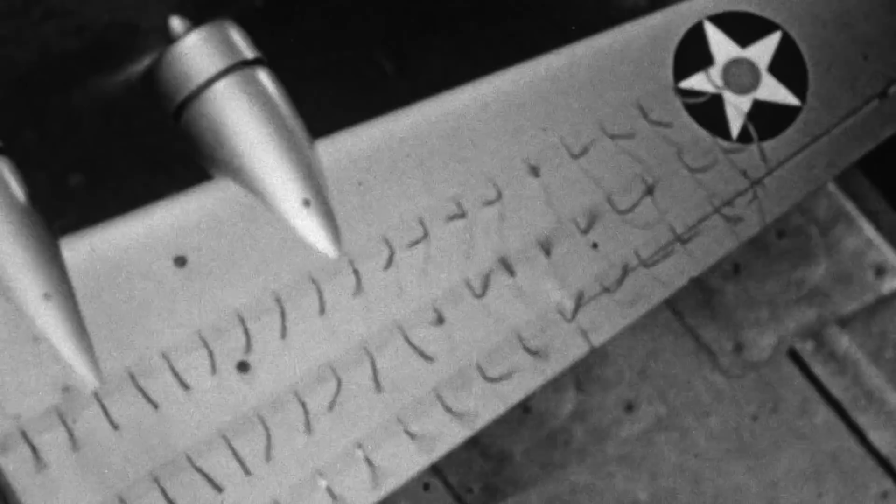The U.S. Army Air Corps wants a modern bomber. They want something with the range, the altitude, and the speed capable of delivering a load of bombs on a target. It's their vision of what future war will be.

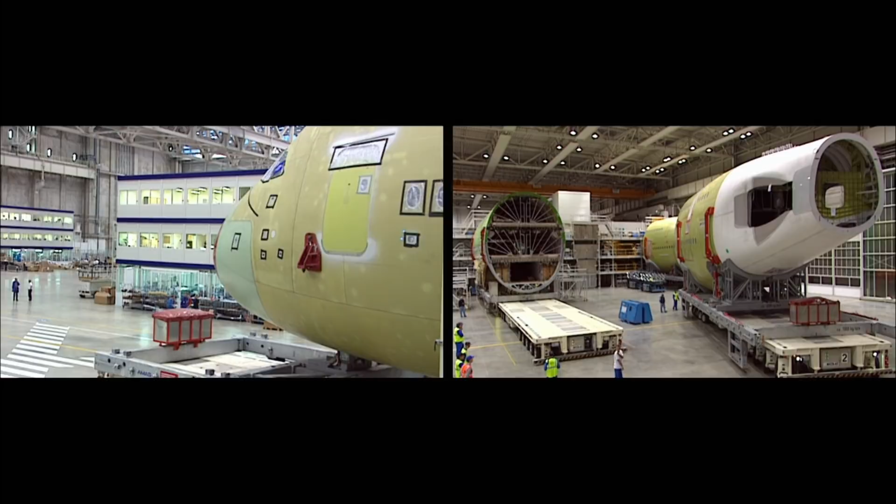Former aerodynamics engineer Charles Champion is appointed to oversee the project's toughest stage, building the plane. Champion will have to arrange for all the parts of the Superjumbo to travel to the Airbus assembly plant in Toulouse.

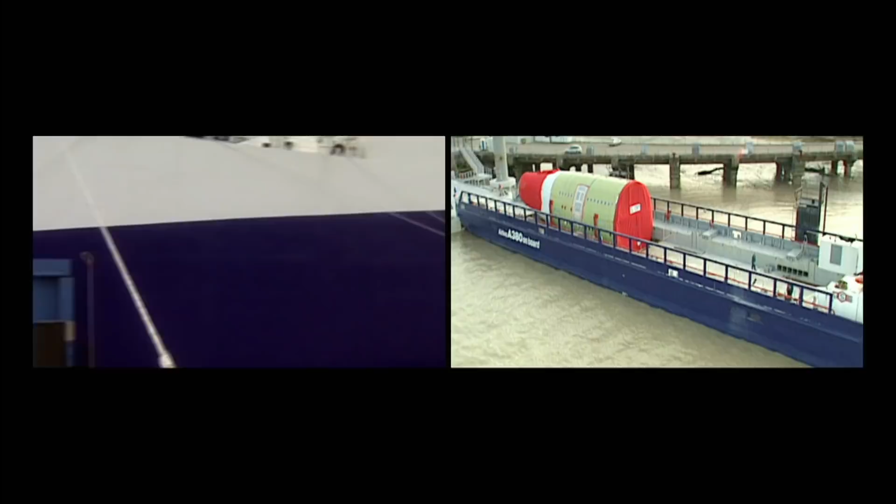After 15 months, he resorts to the unthinkable: a complex convoy of ships, barges, and massive trucks, all converging on southern France. It will demand coordination on an epic scale.

We had to design barges in order to go through Bordeaux, the old bridge, up to Langon. But then afterwards, of course, the river is too small, so we had to go by trucks. So that was a huge project. And immediately, of course, there were many challenges. Where to place the road, and what about the villagers, and this and that.

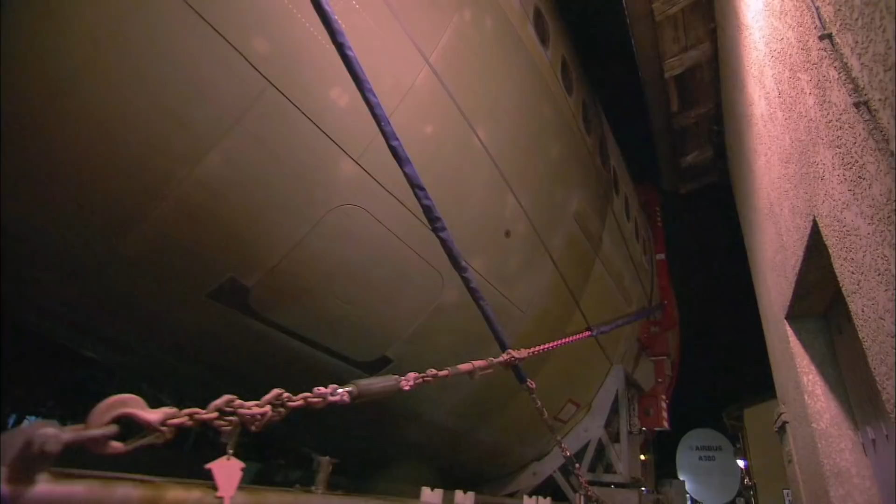In the tiny village of Levignac, the massive sections of fuselage almost touch the walls of the houses as they pass.

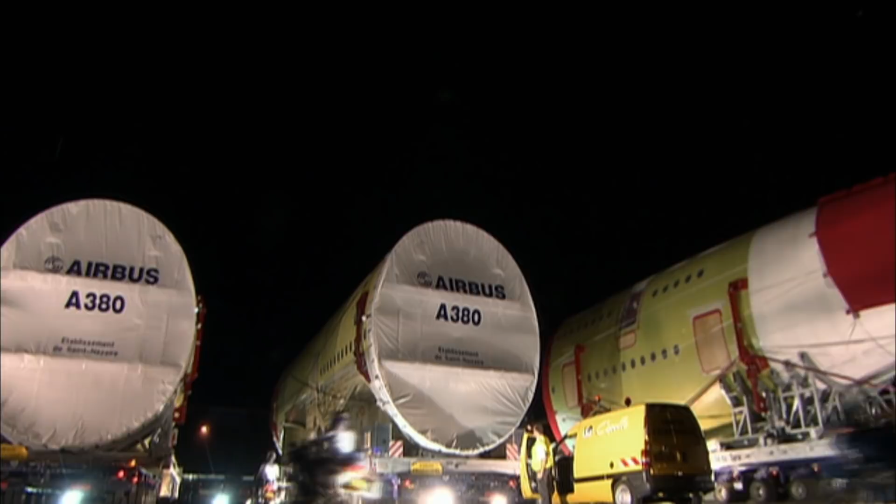After a combined journey of more than 3,000 miles, the largest airplane components in civil aviation history finally arrive in Toulouse. Here, Charles Champion will oversee the construction of the biggest civilian airliner ever built.

January 18th, 2005. The first prototype of the Airbus Superjumbo is revealed to the world in a glittering ceremony. You see all the stakeholders coming in, the head of the customers, the head of states also.

European premiers, who have invested billions of dollars of public money in the project, gather for the event in front of the world's media. This is the most exciting new aircraft in the world. It is European cooperation working at its best.

Your heart tells you, my God, this is the best event I will ever probably attend, because I'm the one who was leading the program. But the star of the show is the plane itself, the Airbus A380.

It's one of those emotional moments where suddenly we realize the size of what you're doing, the level of ambition, the largest aircraft ever in the world.

But behind the smiles, there's just one piece of unfinished business: the Superjumbo is yet to fly.

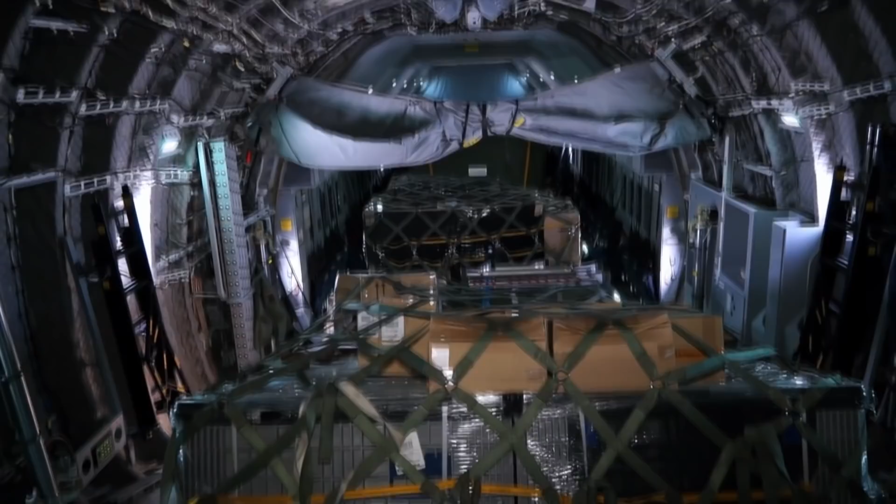The A400M has a maximum payload of 37 tons, a fuel capacity of over 16,000 gallons, and a flying range of nearly 5,500 miles, the distance from Berlin, Germany to Las Vegas, Nevada.

Heading 055. With lighter loads, the range almost doubles. It's also capable of performing tactical missions like medical evacuation flights, aerial delivery, and air-to-air refueling. 40, 30, 20. Designed for extreme environments, the A400M can land on short patches of gravel, sand, or dirt.

We feel committed to make this story a success. A perfect fit for the demands of Germany's Air Force, the Luftwaffe.

This airplane has the look of a toy, but it's real and ingenious. Nicknamed the Pregnant Guppy, it's wide enough to carry space hardware and comes apart to get that hardware in and out.

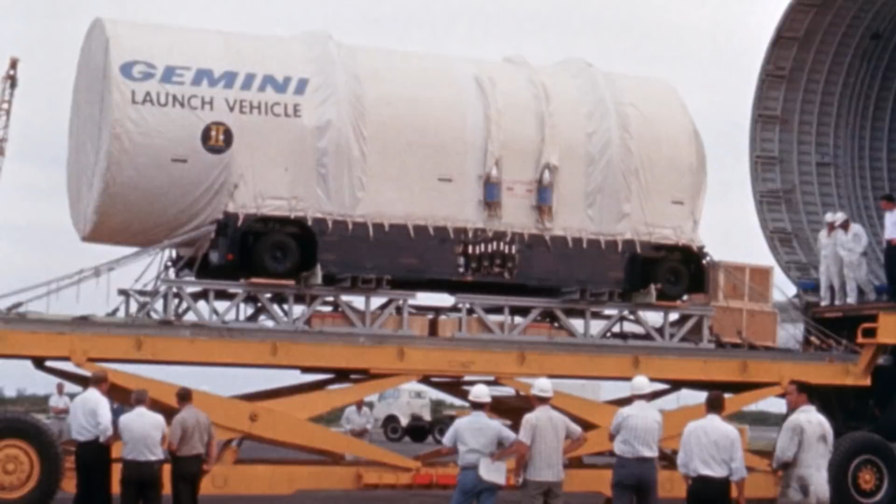First, the stages of a rocket. They'll have to put it together like building blocks. Then, a Gemini capsule. Everything looks right out of a kid's toy box. But this is full scale.

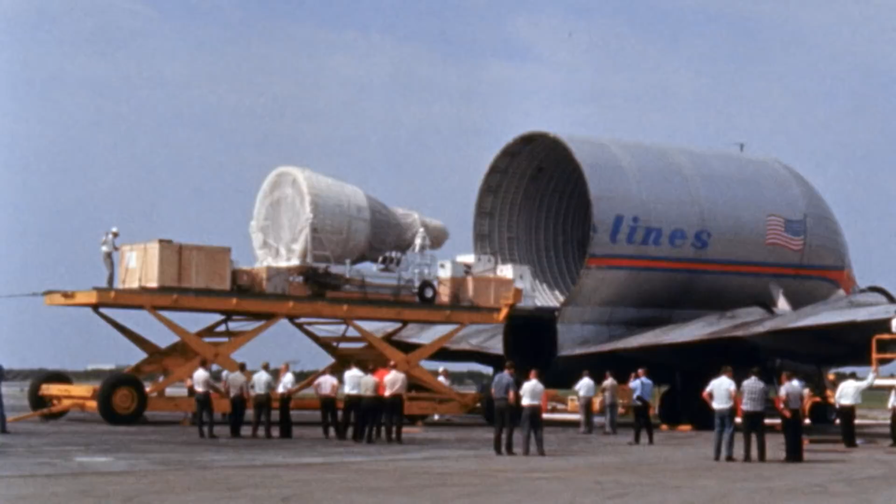Exceptionally complex, uncommonly expensive. And Gus Grissom is about to make it really fly. Grissom joins rookie John Young as America's first two-person crew for the maiden voyage of Project Gemini.

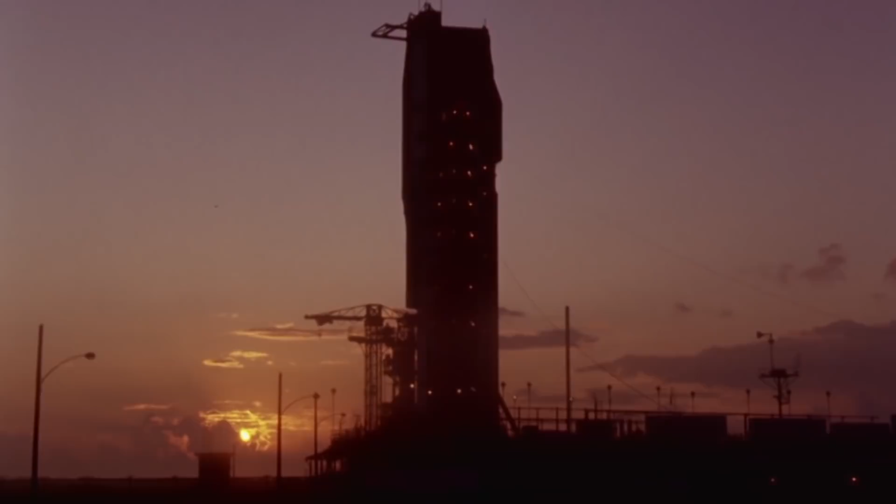4, 3, 2, 1, 0. Ignition. Gemini 3 pierces into the sky, flying straight and true.

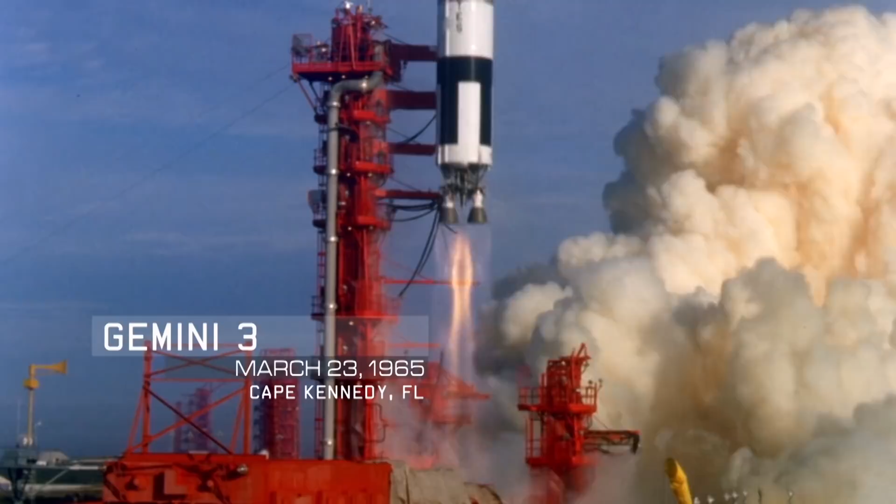The powered flight was very smooth, smoother than we had any reason to expect, and there isn't a jiggle or a bump in it in the whole first stage flight.

I have your backup times on bank angles and time to reverse bank angles. Astronaut Gordon Cooper, one of Grissom's best friends, guides them around the globe. Hello there.

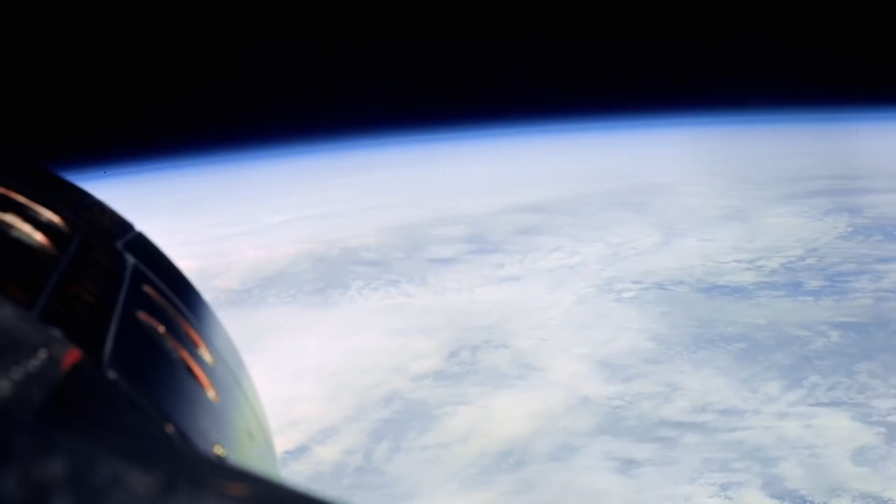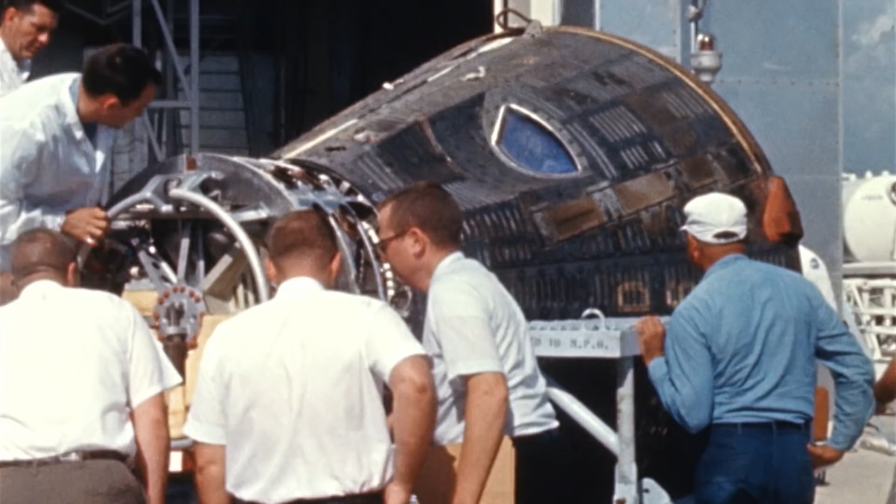They land 52 miles off target. We're 50 miles from the spot there. By the time the Navy finds them, they've been pitching in deep swells for 30 minutes, costing Grissom his breakfast. Recovery, go ahead. Monitor, we have both astronauts and the capsule at this time returning to the carrier.

All well. The capsule shows the scars of re-entry but passes the flight test. It's airworthy and airtight. Few know that on the next Gemini flight, they'll open the hatch on purpose in space. It was actually a kind of secret effort, and the rest is one of the most extraordinary episodes in the whole history of NASA.

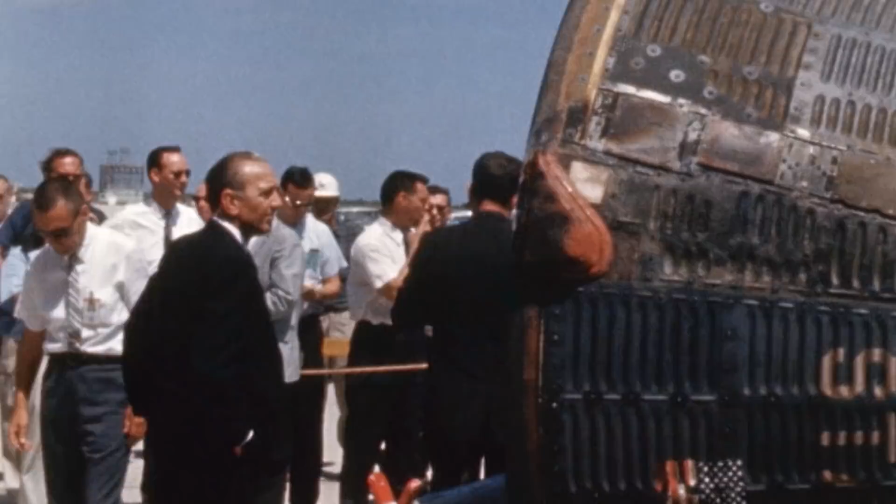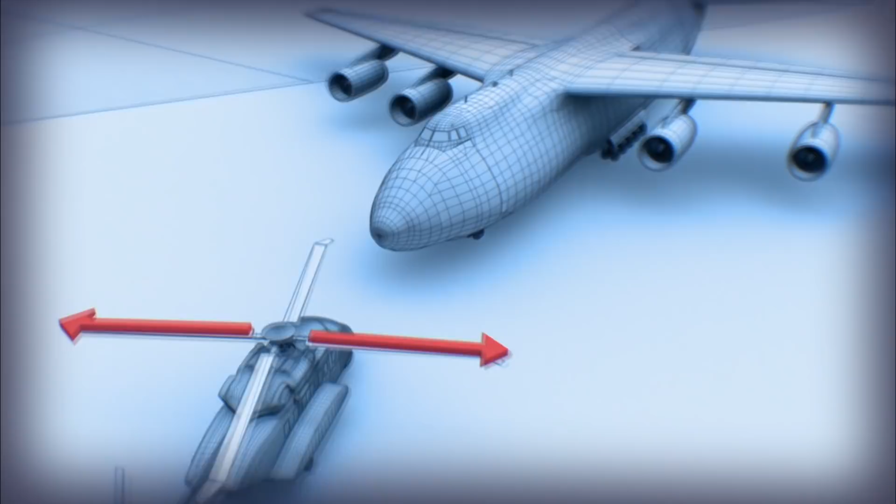The helicopter's rotor blades boast a massive 56-foot span. Try to squeeze the S-92 on board, and there will only be one outcome.

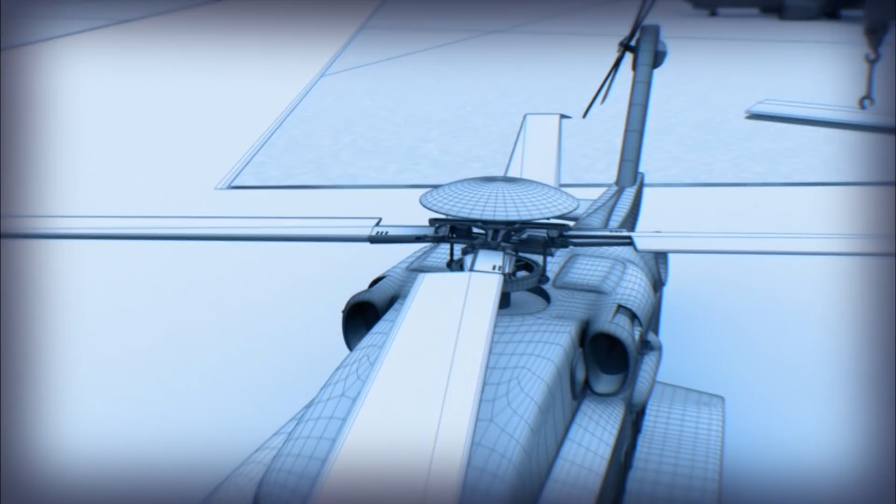So Dan's team must take the blades off one by one, handling them with extra care. Easing the pins loose, making sure not to score or twist them, and keeping the highly tuned aerofoils dent-free. Only then can the S-92 begin the rest of its journey.

What they'll have to do is take off all the blades, the tail rotor. You can see the protection going on right now for some critical parts so they don't scrape paint.

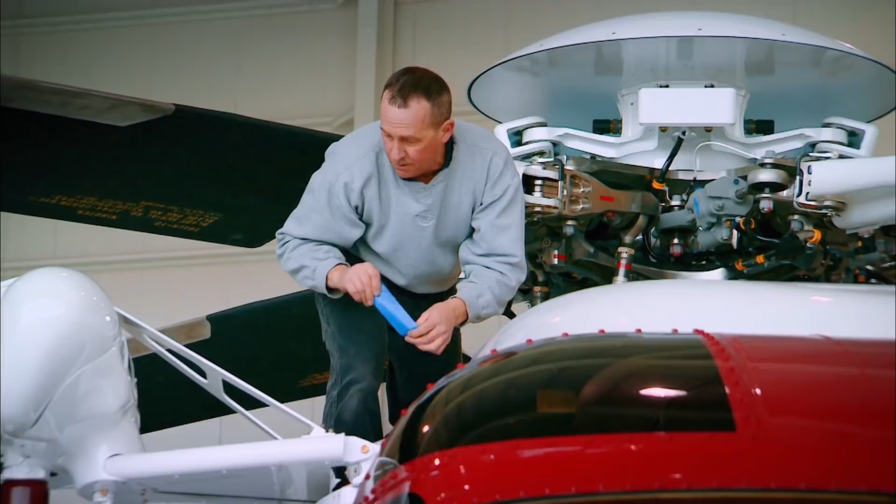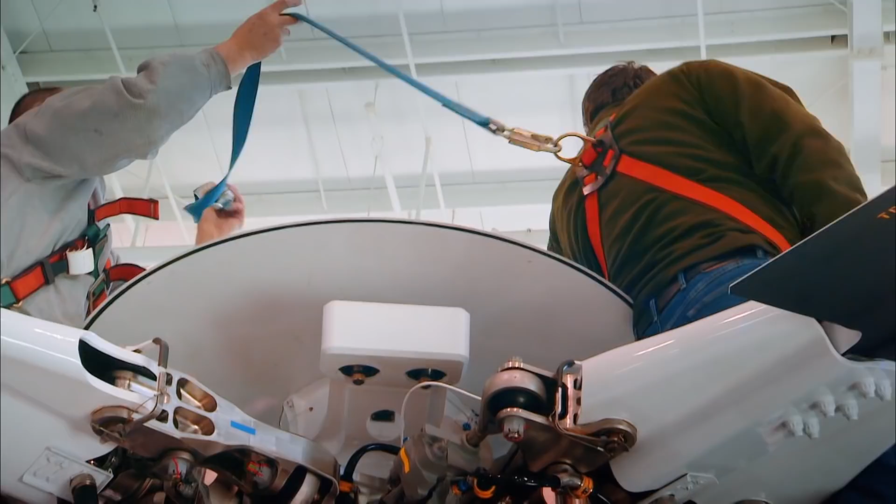First task, take off the rotor blades. They'll use a crane to take the weight of each blade. They must keep them perfectly positioned so their pins slide out without a struggle.

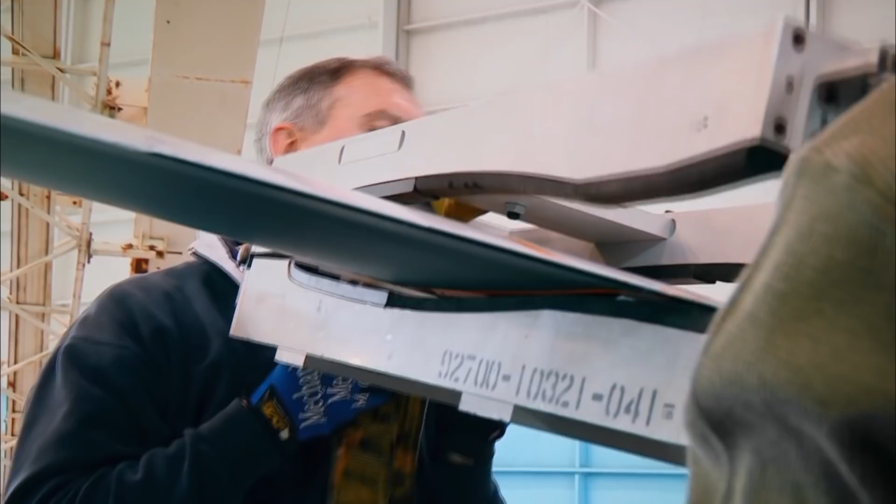We have liftoff, Houston. Position. Yep, okay, I got the boom.

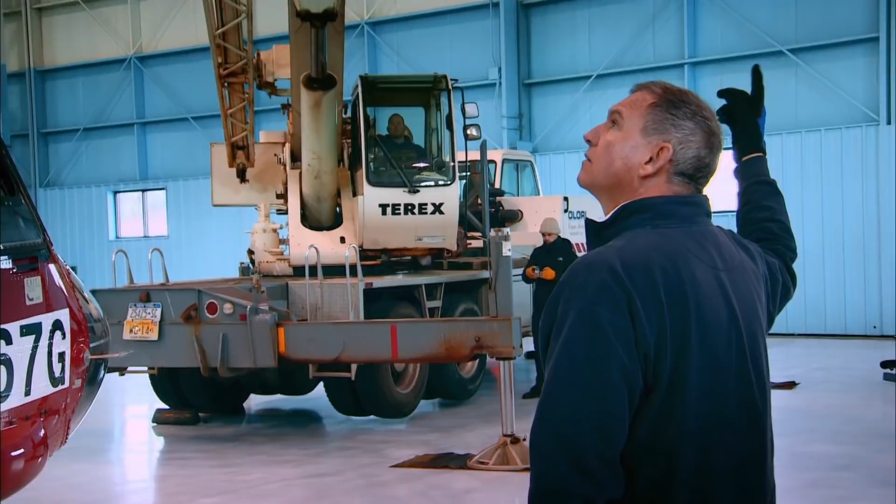Each blade is worth $500,000. A dent in their precision-engineered aerofoils could affect the S-92's ability to fly. Try lagging the blade a little bit.

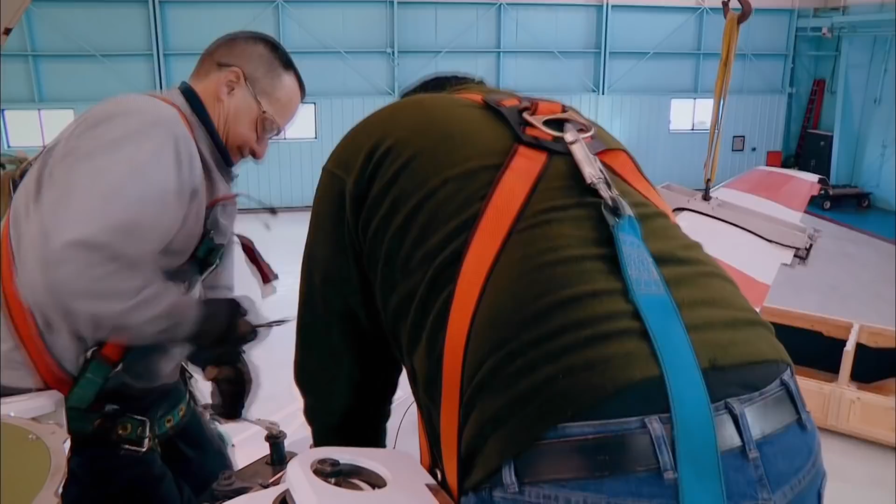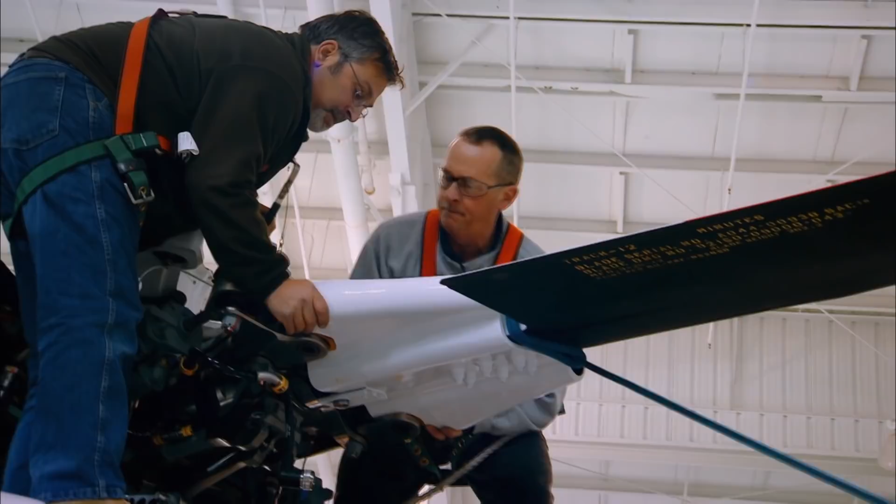Okay, hold it. Lead it. Blade's coming out. You guys got it. Let's hope the other three go as smoothly as the first.

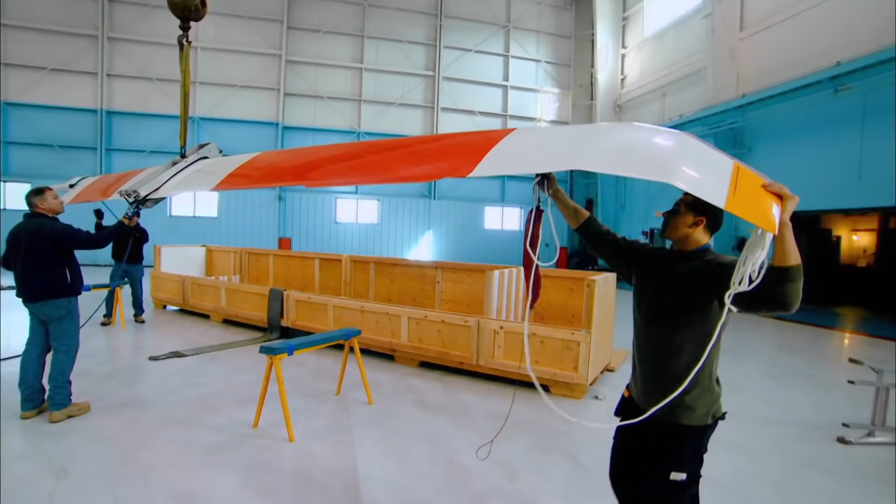It takes 30 painstaking minutes to remove each blade.

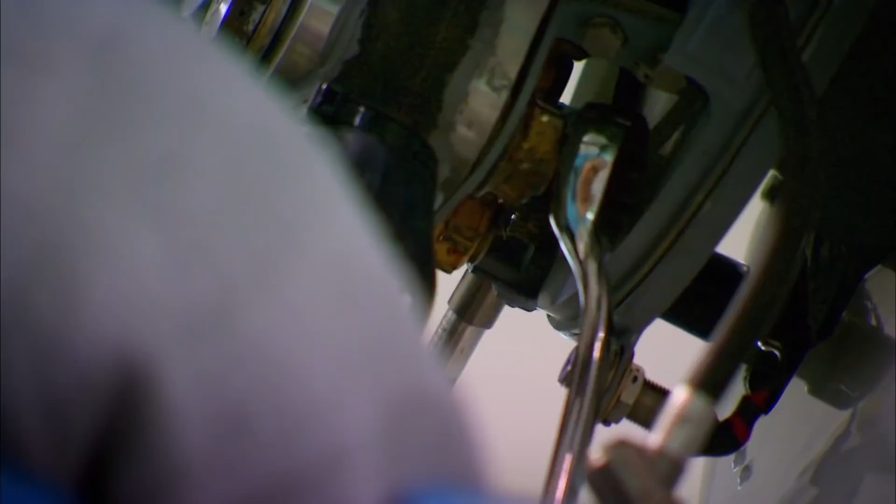Last task, remove one of the rear rotors. Yeah, you've got two on there. There might be a third. The blade will slide right out of the cuff. Watch the pitch link.

Each of these blades is worth $210,000. Damn it. Holding this in your hand is about the equivalent of holding a Dodge Viper or a high-end Corvette. So we want to make sure as well that this is equally as protected as the main blades.

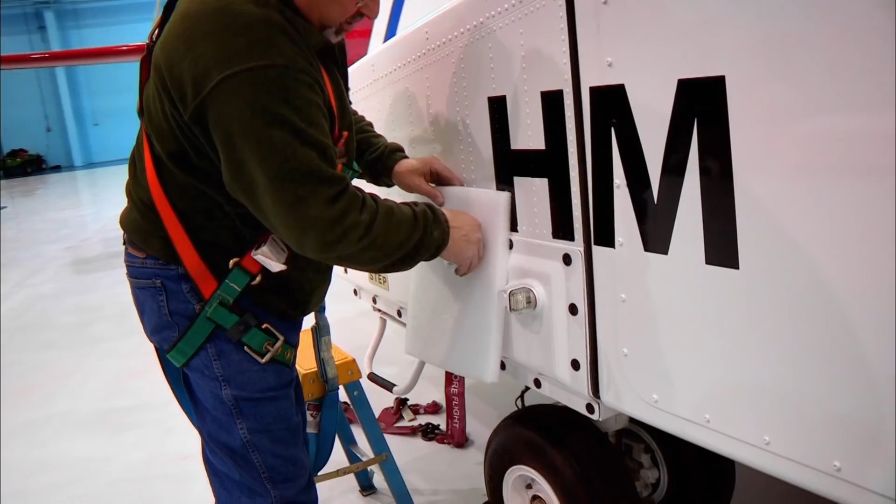We got a piece of styrofoam that we put on here to help protect the aircraft. No scratches. It's an extraordinary amount of wrapping and packing, but it's the only way to give the precious helicopter a fighting chance of squeezing into the Antonov without a scratch.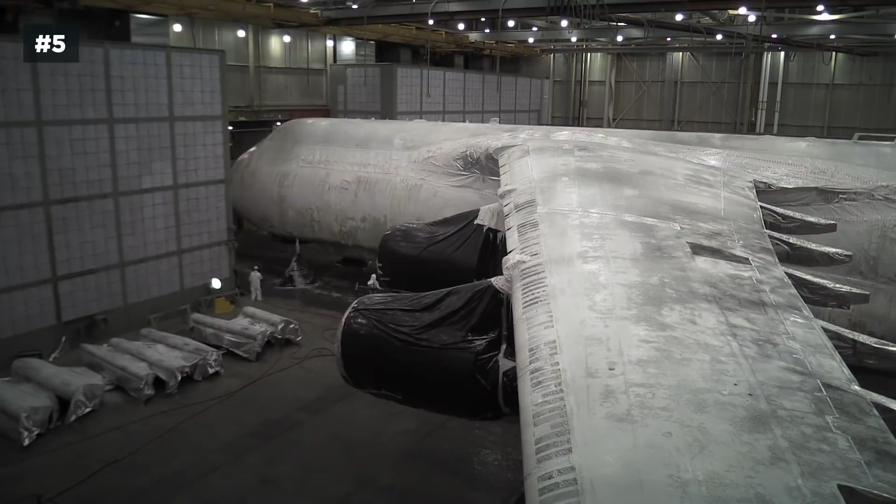Getting under the skin of a C5 really gives you an appreciation for the engineering. The paint alone is 2,600 pounds, but when you have that removed, you can see all the rivets and fasteners it's actually used to put this thing together. When you add them up, it's over 1.6 million.

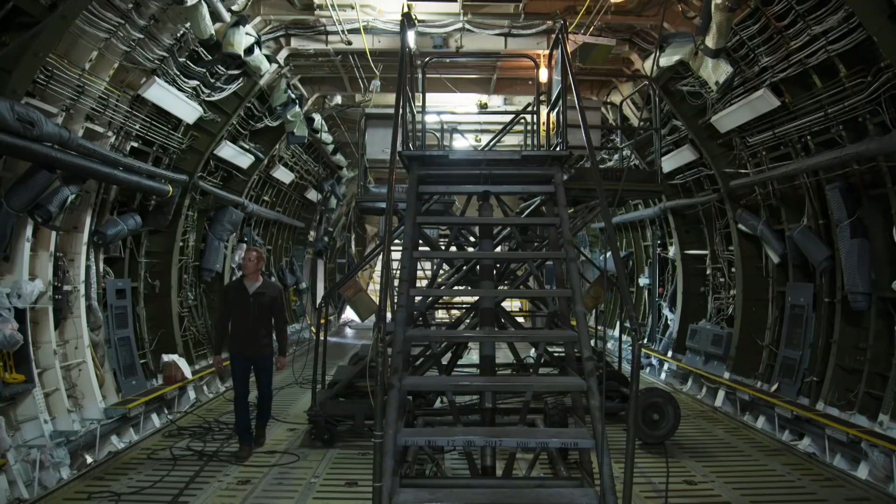To really appreciate the size of a C5, you've got to get inside. This cargo compartment measures 19 feet wide, 13.5 feet tall, and over 143 feet long, which is longer than the Wright brothers' first powered flight at Kitty Hawk, North Carolina. This allows a C5 to carry more troops and supplies than any other airlifter in service today.

The cargo hold was the breakthrough that won Lockheed the contract, but building it was a serious challenge. To begin with, access. Giant cargo needed a giant opening. But the front of any plane is blocked by the cockpit. The solution?

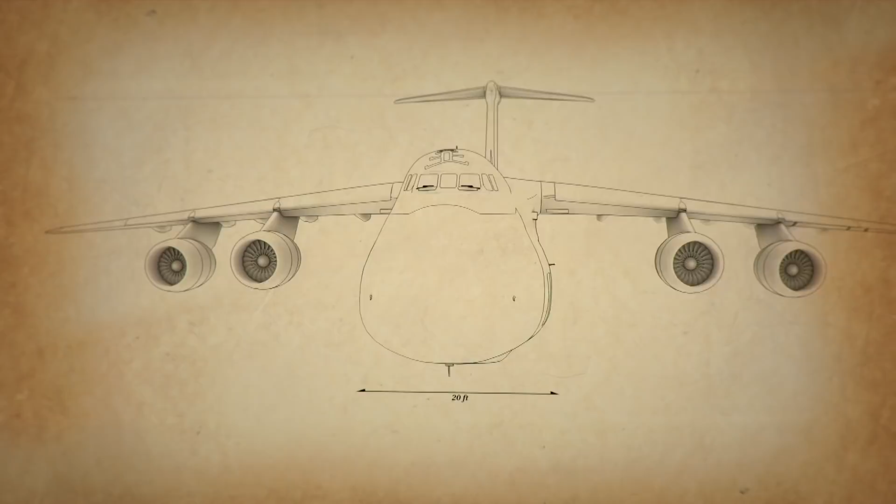A nose cone that swings up to become a massive door. It's called the visor. I've seen this open and close 20 times, and it's still an amazing feat of engineering. 20 feet wide and weighing in at over 6,500 pounds, the visor swings up 65 degrees to clear the cargo bay and sit above the cockpit during loading.

At the rear, another colossal door, 23 feet long and 18 feet wide, creating an open-ended drive-on, drive-off cargo hold the size of a bowling alley. So this is the back end of the cargo bay, and just to give you an appreciation for how big this is, you could actually fit 58 Cadillacs inside of there.

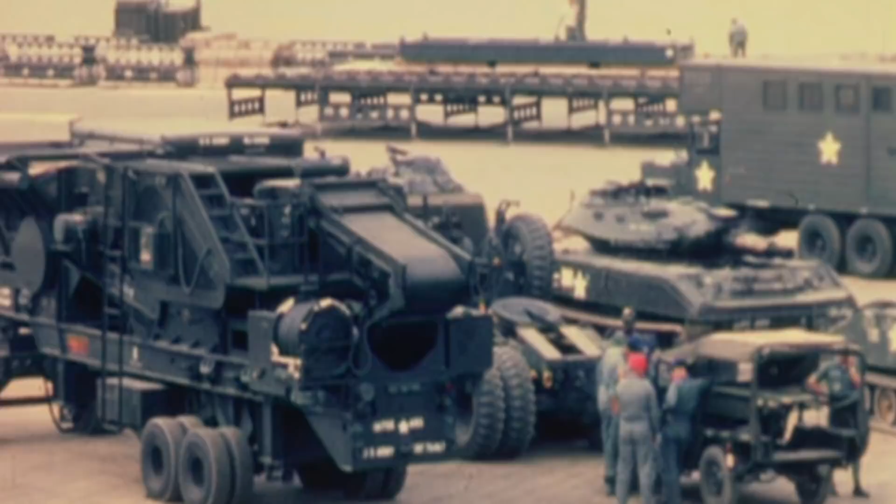The C-5 was the only aircraft that could deliver two 65-ton battle tanks directly into a theater of war. It could also transport mobile bridges, armored personnel carriers, troop trucks, and just about anything an armored brigade would need on its deployment. It was a game changer for U.S. military long-distance operations. The visor was a creative solution to one of the problems of building a plane on this scale.

Jay Carter of Carter Aviation Technologies is the first engineer to successfully use slowed rotor technology. The advantages of slowed rotor compound is that it gives us better speed, better efficiency, and better safety than any other aircraft.

His first prototype was called the CCTD, for Carter Copter Technology Demonstrator. It's an aircraft, it's a gyro, it's a helicopter, it's a hybrid. By combining all three of these, we got an aircraft that can take off and land vertically like a helicopter, yet fly as fast and as efficient as a fixed-wing airplane.

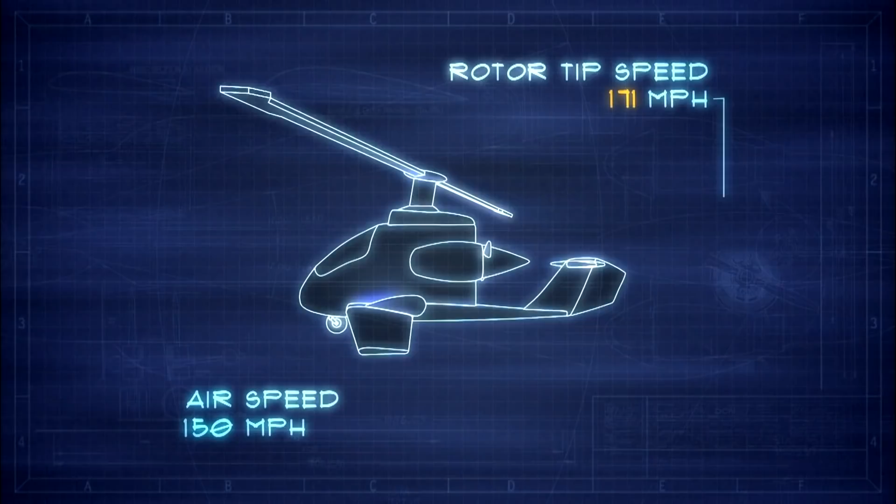Rotors, especially on gyroplanes, create enormous drag, which limits airspeed. It took Jay 7 years to work out what had to be done with the rotors for high-speed flight. And on June 17, 2005, he proved what everyone had said was impossible. He slowed the rotor down enough to almost eliminate any drag, thereby increasing his airspeed. He achieved what's called mu1, where the airspeed equals the rotor tip speed.

The advantages of mu1 are the fact that we've been able to slow the rotor down so much that it now basically disappears, from a drag standpoint. Nobody had ever done this before. After we broke mu1, we ended up on the very next flight having an accident. Nobody was hurt, but we did pretty well tear up the aircraft.

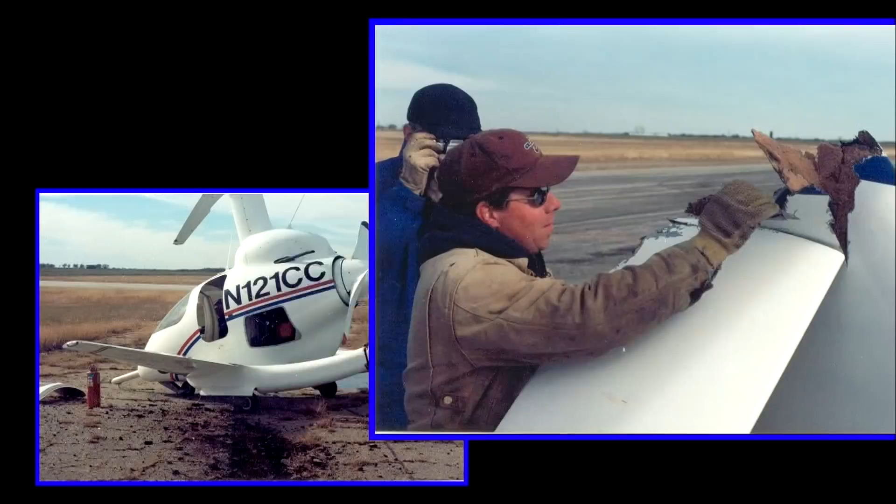Fuel filler cap. Today, Jay's team is flight testing the latest prototype. All surfaces, good. Propeller and spinner, good.

You ready? Okay. Ready? Yep. Clear.

The vehicle can either take off with a short taxi run, or it can take off vertically. That's not what gyroplanes normally do. So when we spin this rotor up like this, there's a whole lot of stored up energy, like a flywheel. And so we literally can jump in the air on just the stored up energy that we have in the rotor blade.

Over the next year, Jay will keep testing his prototype and improving his slowed rotor system. After that, he plans on scaling up the challenge.

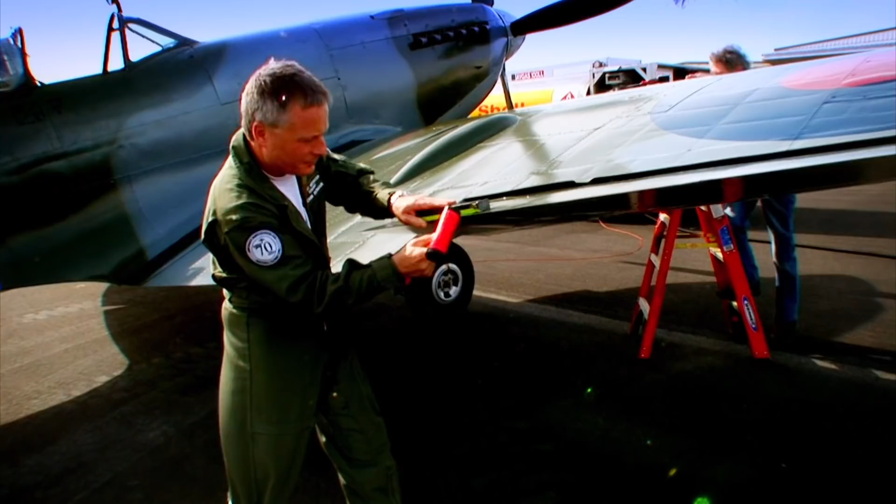Today, only 50 airworthy Spitfires survive. Maintaining one of these aircraft costs tens of thousands of dollars a year. Tom bought the aircraft for almost $2 million and invested over $300,000 more, restoring it to its former glory. Aviation experts John Romain and Mo Overall led the project. Now, Tom wants Mo's team to bring the Spitfire home to Easton for him to fly.

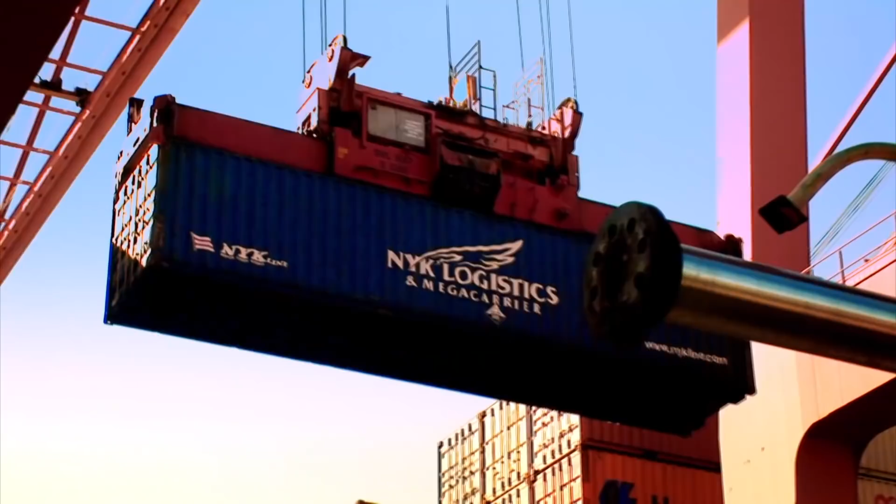Mo's team decides to dismantle the Spitfire and ship it to America inside a cargo container. The move will cost Tom nearly $40,000. The team's main concern is, will the Spitfire still be fit to fly when it arrives?

You run the risk that every container is going to be banged or knocked at some point in that shipping process. There's the road transport, ships, the craneage. The worst case scenario is that the container actually rolls over, and then you really are into a lot of damage. The first task we do when dismantling this aircraft is we'll remove all the main panels.

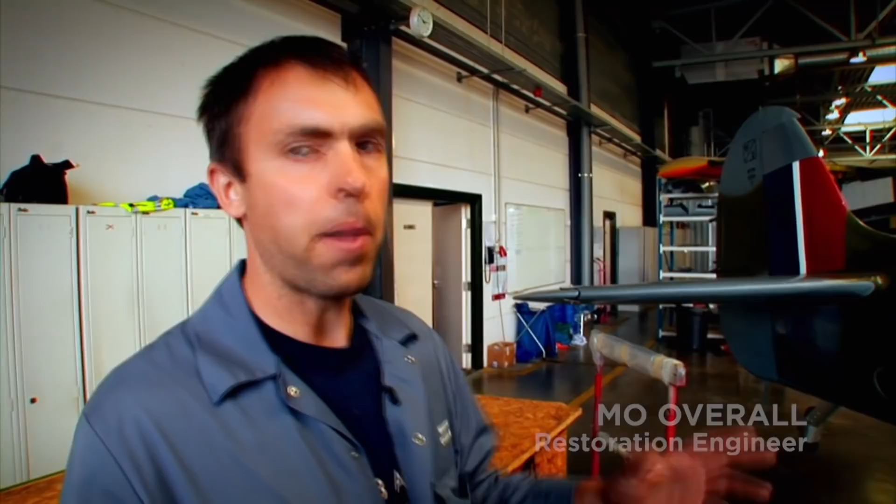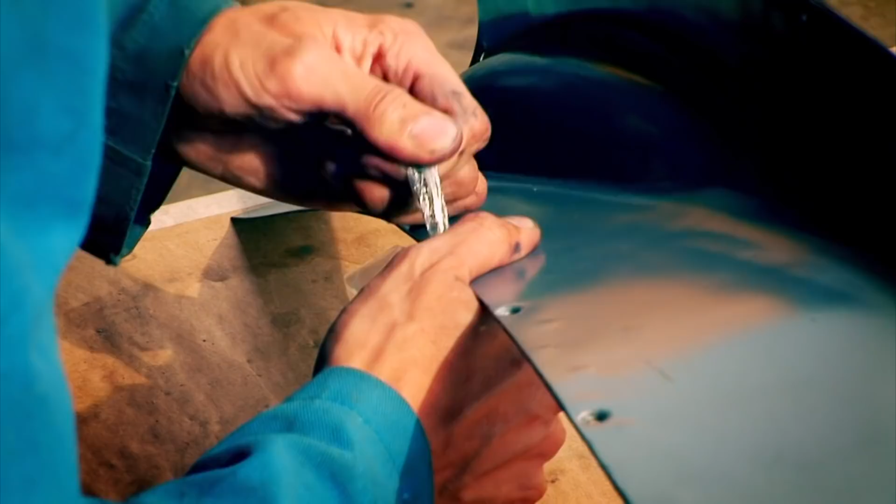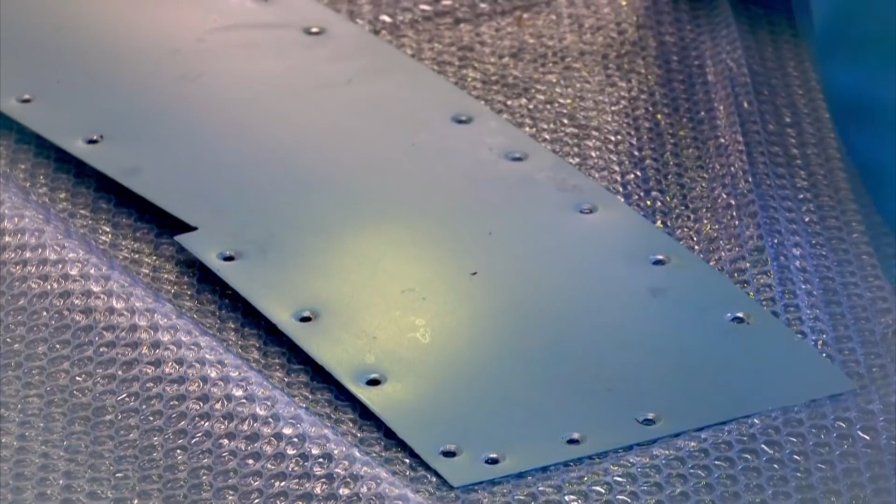You have to bag up the screws so you know where they go, because every screw is different. Every component that's taken off is checked and cleaned and wrapped up. When you're working away from base, you don't want to find any part that's damaged. So when you get to the other side, it's straight on and you know it's okay.

With its innards exposed, they can begin to take the Spitfire apart. Its unusual design makes this difficult. The problem with the Spitfire is that the wings carry the undercarriage legs. So once the wings are off, the fuselage is completely immobile.

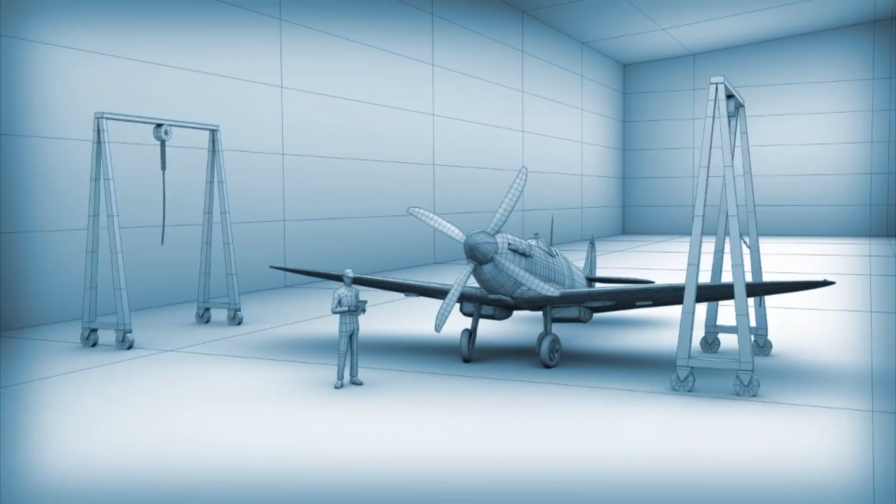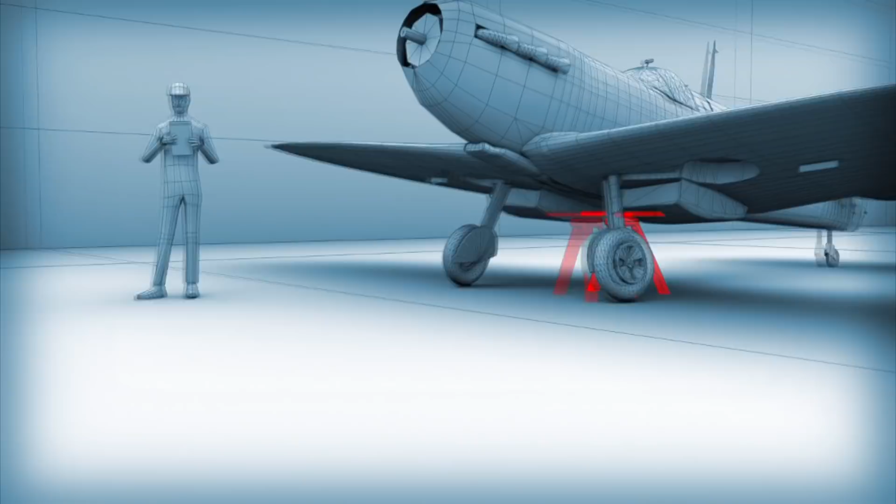As the team removes the wings from the fuselage, they also take away the plane's only form of support, making it dangerously nose-heavy. To stabilize the Spitfire, they will take off the heavy propeller first and build support towers under the plane's fuselage, nose, and tail.

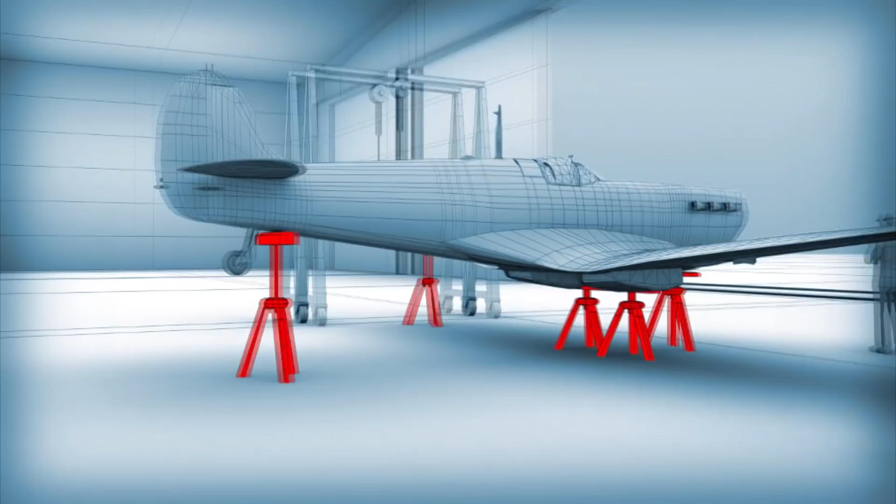Extra towers will prop up the wingtips. With the aircraft balanced, they'll use cranes to lift off the Spitfire's wings.

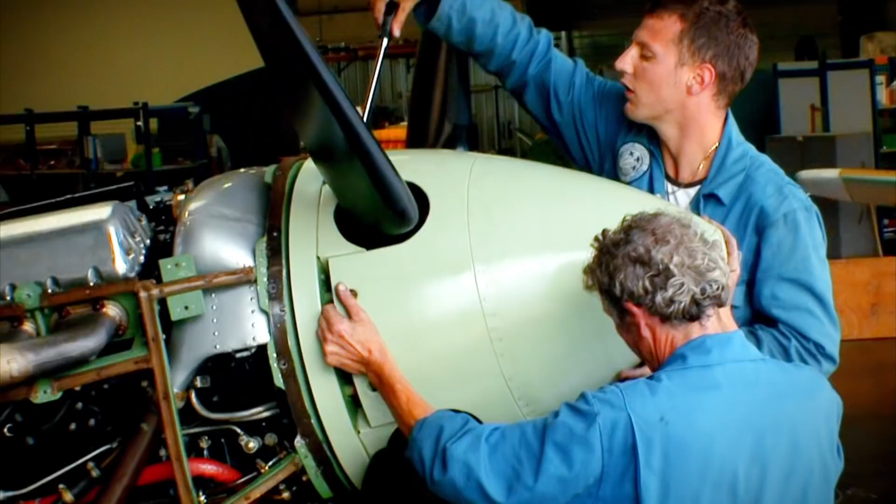With the towers in place, they carefully remove the Spitfire's propeller. With the propeller on and the aircraft on jacks, it's quite tail-light. You have to be very careful that it doesn't tip on its nose. The slightest dent on the propeller blade could fundamentally damage the aircraft's flying performance.

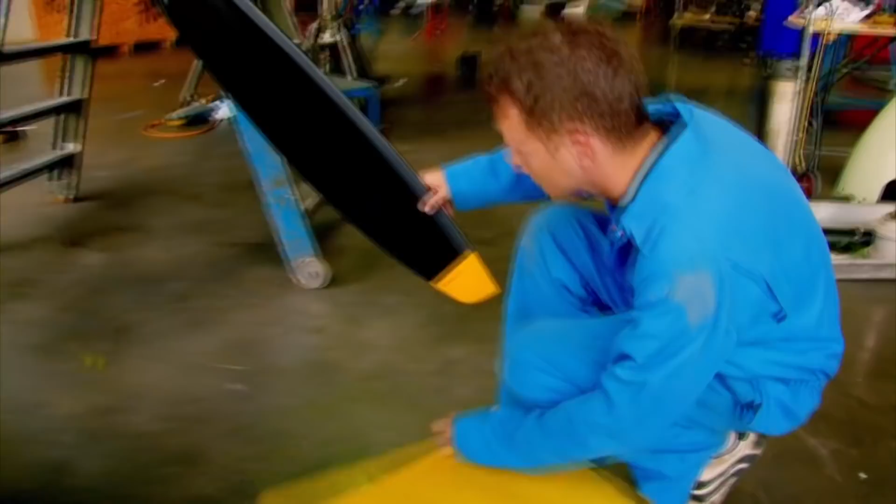Right. The crew has to carefully remove the Spitfire's wings to fit it inside the crate.

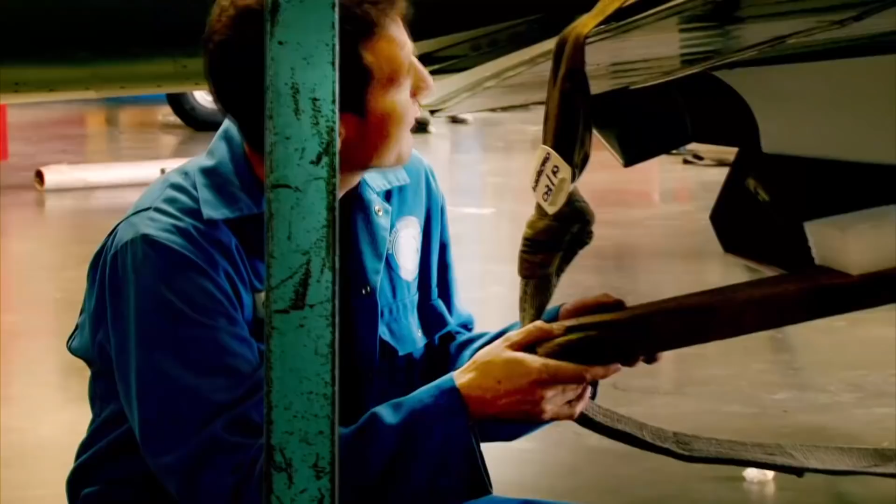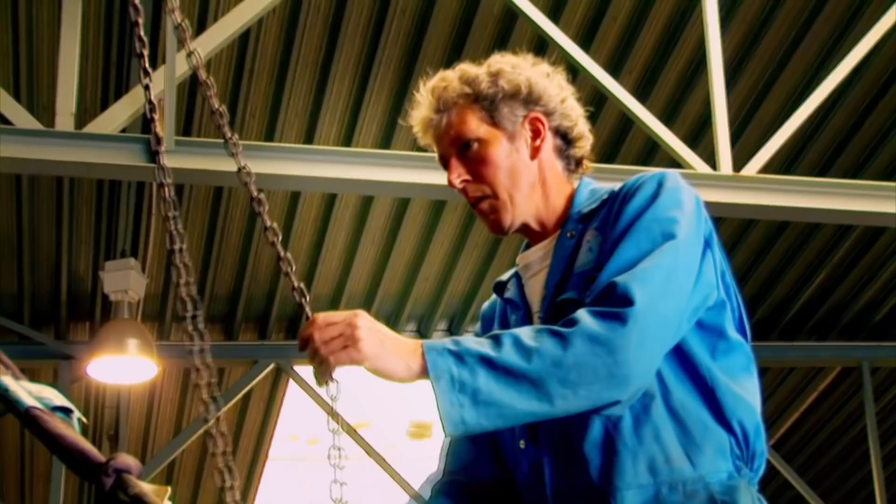They'll lift the half-ton wings up with straps. To prevent the straps from tearing into the underside wing panels, they protect them with padded wooden beams.

It's always a bit nerve-wracking when the wings come off. We have to make sure everything is trestled very carefully because the aircraft is quite unbalanced.

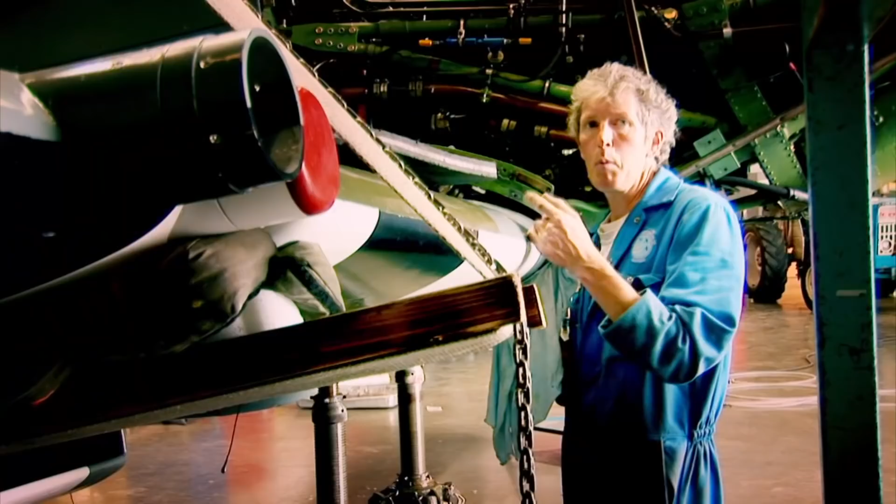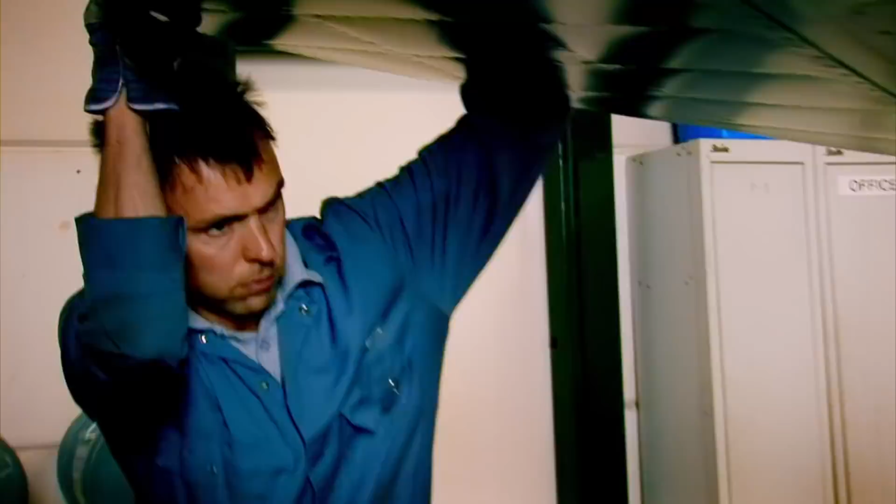Up, OK, up and down. Get ready, because I don't know quite what it's going to do. Right, here she comes. Here it comes. The wing is the most difficult part to take off because it's awkward to hold, awkward to handle, and also very heavy.

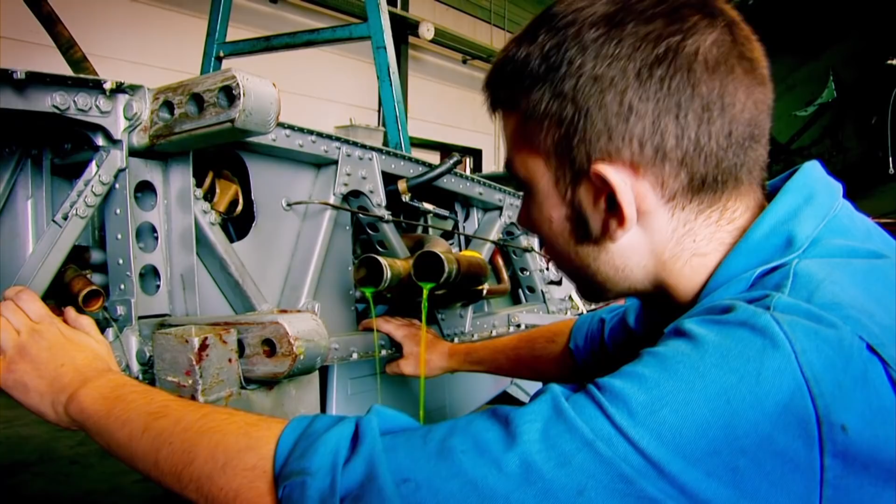Splendid. One wing down, one wing to go. Okay, yeah, there it comes.

April 2005, bright day in Toulouse. 40,000 people around the fences of the airport to see this. Quite an event for us: the first flight of the A380.

Flight test engineer Fernando Alonso knows how dangerous this moment can be. When you fly an airplane for the first time, things can go wrong. There's no time to think what to do when you're up in the air. So you better have thought about what you're going to be doing before you actually take off.

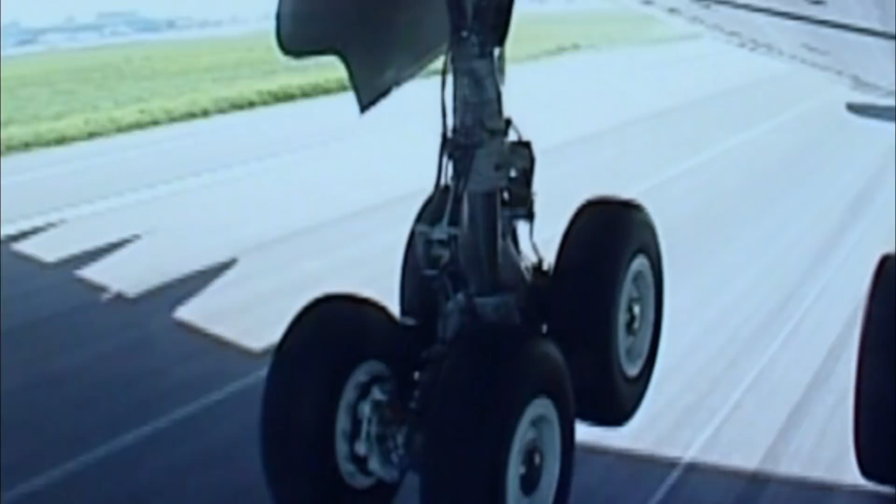At 10:29 a.m., under a cloudless sky, the A380 accelerates down the runway. The huge machine lifts effortlessly into the sky.

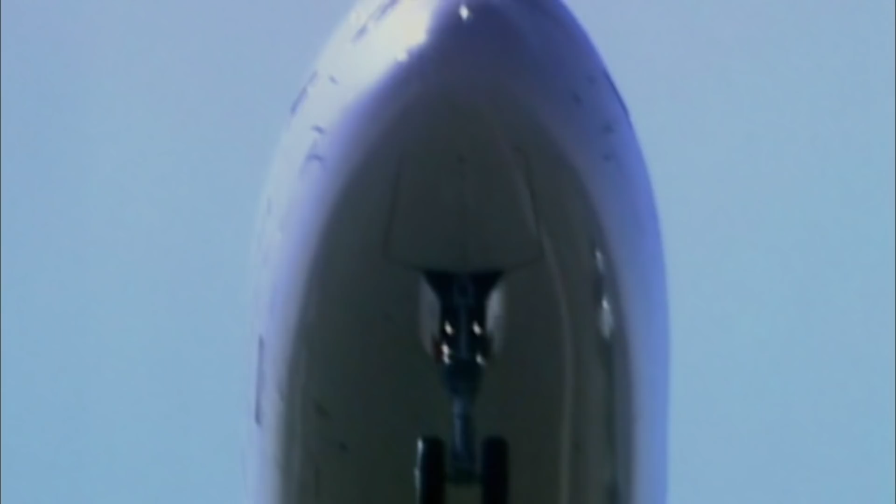Before, you got a chunk of carbon, aluminium, sitting on the ground, and then suddenly when she flies, I mean, she's alive.

It flew incredibly well. It flew beautifully from, I would say, from 1 minute after liftoff. We had imagined this moment for years and years and years, and suddenly it happens. Wonderful day that I will remember all my life.

After 4 trouble-free hours, the A380 touches down and enters the record books as the heaviest flight in commercial aviation history.

Over the next 19 months, the plane undergoes 2,500 hours of flight tests. These are an essential part of aircraft certification.

But for the A380, they also serve another purpose: convincing the public that flying on such a huge plane is safe. There was a public perception of, isn't it going to be dangerous, with all those many people on the airplane? And yes, this airplane was big, but it was just another airplane, and it had to be handled and could be operated like any other airplane. It just happened to be bigger, that's all.

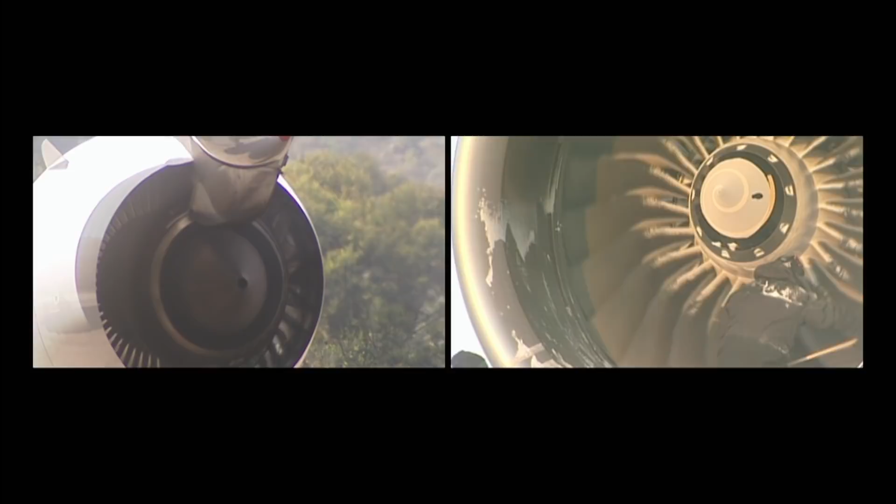The test pilots pushed the A380 to its limits. We went to very hot climates, went to very cold climates. We brought the airplane to its structural limits. We brought the airplane to its aerodynamic limits.

In one test, in order to identify the minimum takeoff speed, pilots deliberately dragged the tail along the runway. The A380 passes every test with flying colors.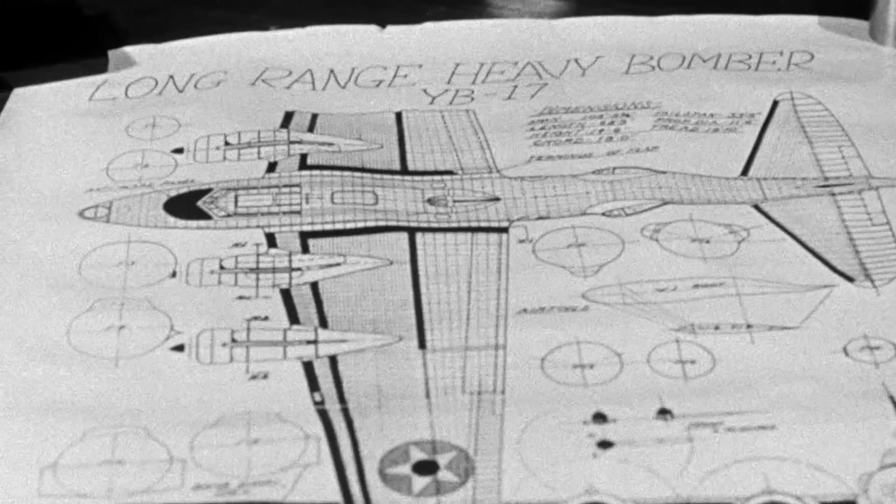By the mid-30s, the demands for a supreme military weapon take shape. The U.S. Army Air Corps wants a modern bomber. They want something with the range, the altitude, and the speed capable of delivering a load of bombs on a target. It's their vision of what future war will be.

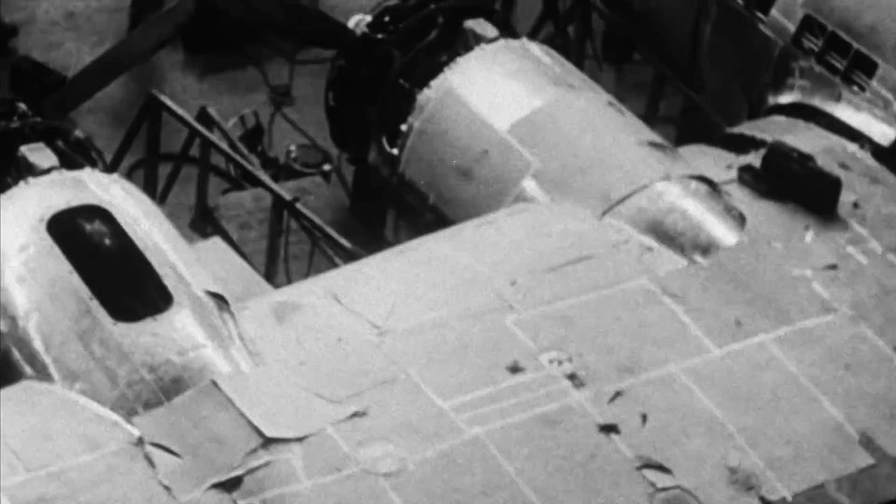In 1935, the Boeing company develops a breakthrough 4-engine, long-range aircraft that can carry a 2-ton bomb load and is heavily armed: the B-17.

The excitement generated by the B-17 leads many air power advocates to claim the bomber could fly anywhere, unescorted. In flight, the B-17 is a formidable fighting machine, operated by a 10-man crew, each one with a specific job.

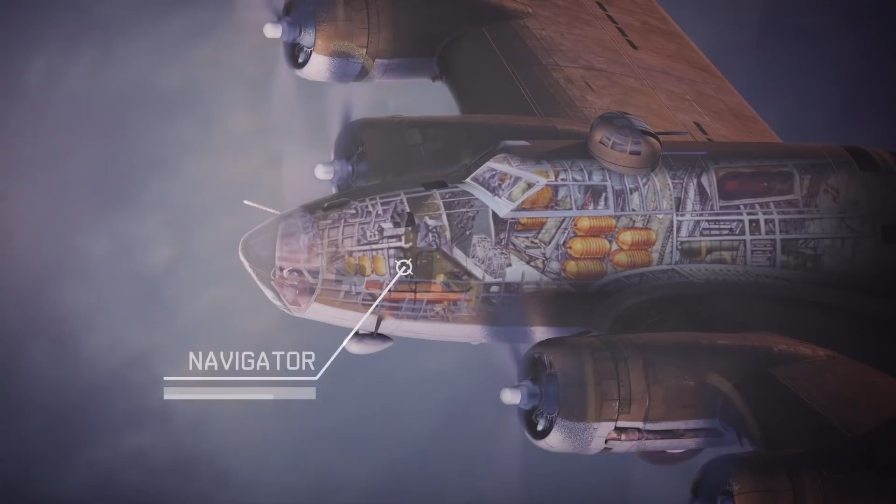In the front of the airplane, you have the bombardier. His job is to drop the bombs in the bomb bay in the center of the aircraft on the target. The navigator's job is to guide the airplane to the target. The 2 pilots right behind them guide the airplane, operate it, fly it.

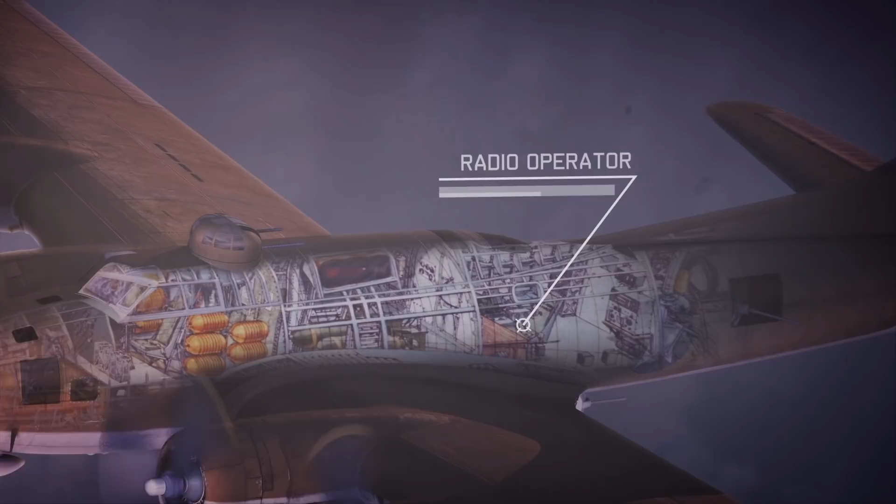The radio operator on a B-17 performs the critical function of communicating with the other bombers in the formation. For the rest of the airplane, it's all about the defensive armament and employing that in defense of the airplane. The top turret gunner, the waist guns, the ball turret on the bottom, and the tail turret all defend the aircraft against enemy attack.